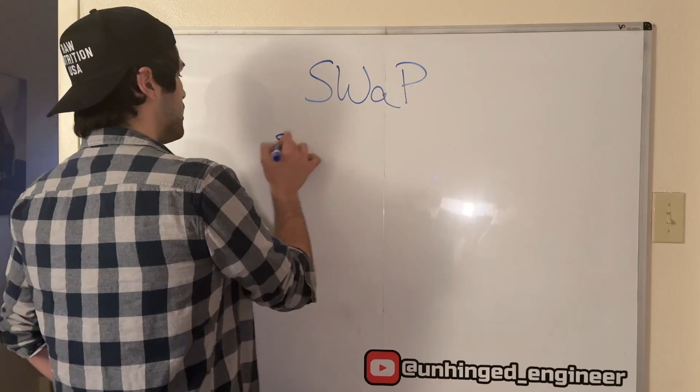So yeah, let's get into this super fundamental topic I really want to talk about today, and that topic is SWaP. I would be surprised if anyone who's began their engineering journey in any discipline, not just aerospace engineering, hasn't heard this before. But in case you haven't, it's an acronym that stands for size, weight, and power.

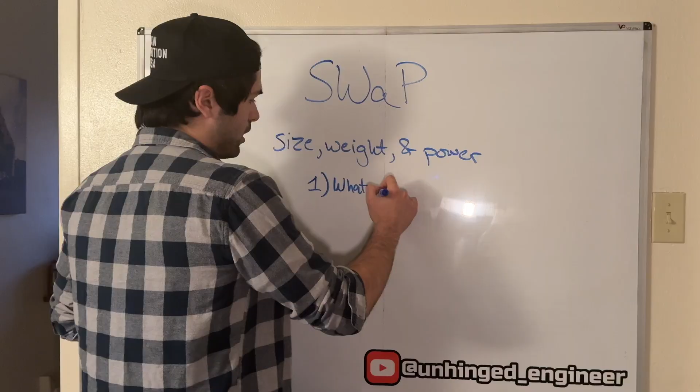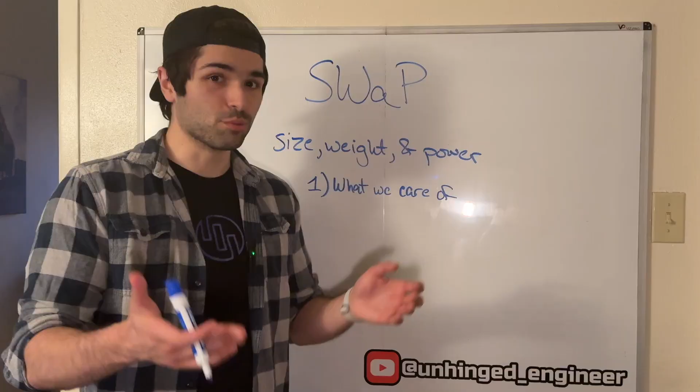And it serves to illustrate two things. For one, just on its face, these are what we care about - these are the qualities or characteristics of our system, our aerospace system, whether it's a drone or a satellite or even a wheeled robot, whatever we're working on, that we care about: how big it is, how heavy it is, and how much power it consumes in its normal operation. So on its face, it's just pointing out that these are very important qualities of these systems as a whole.

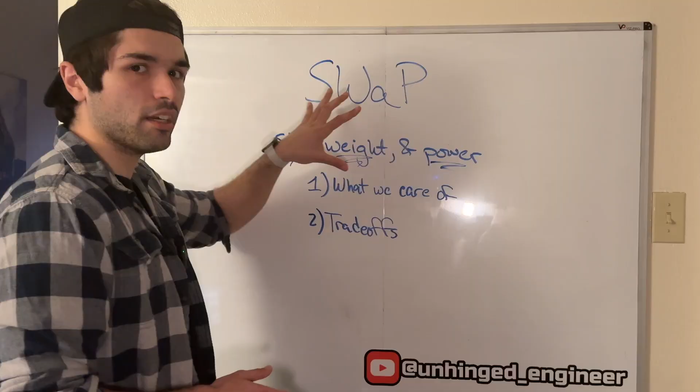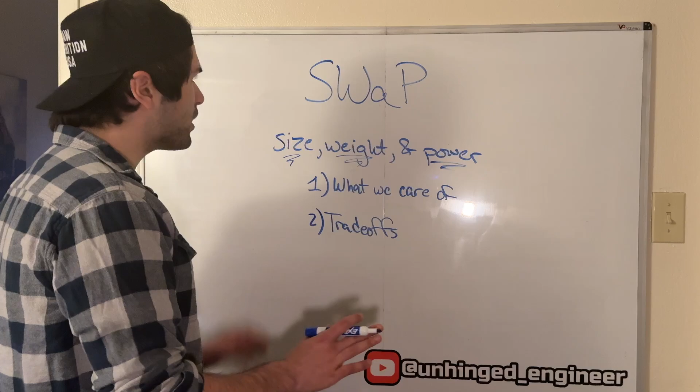But the more subliminal and, in my opinion, deep-rooted foundational concept here is this concept of trade-offs. This is the point that really made me want to talk about this in video form, because not only is it something you need to infer from this acronym - it's not explicitly stated here - but also I think this is where the magic really happens, and where when you talk to an aerospace engineer with years of experience, their understanding of this is what immediately sets them apart.

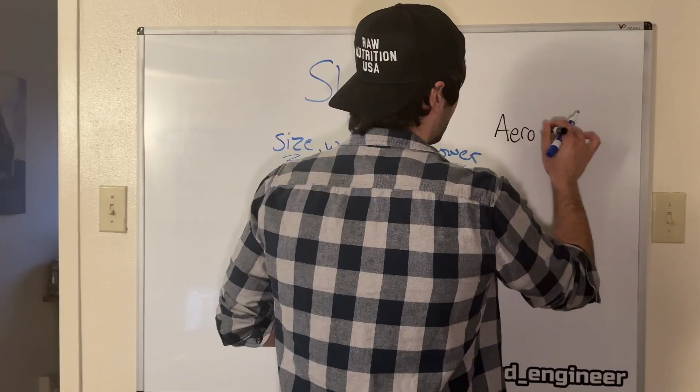And so before we get into the specific concept of trade-offs with size, weight, and power, I want to just affirm why I'm talking about aerospace here. Because as I'm sure anyone who's not studying aerospace is well aware, this is a very universal concept to engineering - it's important in mechanical, electrical, chemical, civil, whatever we're working on. But I think there's two fundamental things about aerospace engineering that make it particularly important and relevant.

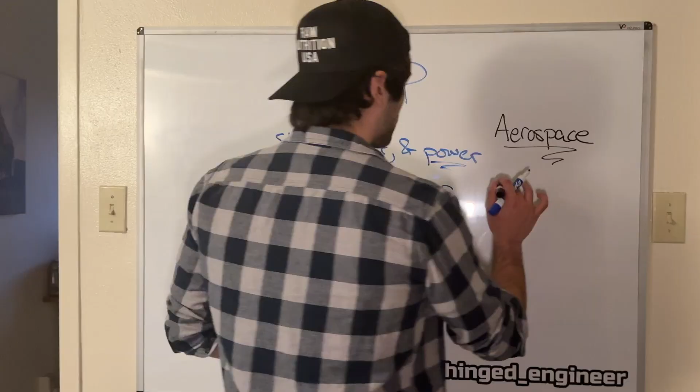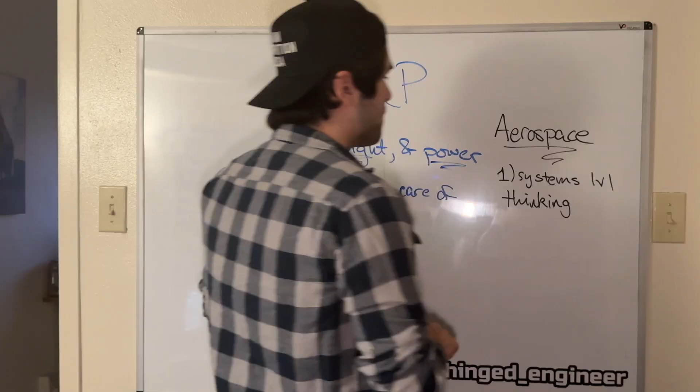So the first one I want to talk about is system level thinking. This is the way I was taught in school when I studied aerospace: other fields like mechanical, electrical, some of the ones I mentioned, you're really studying a field, an area of study. You're building up a knowledge base that you are then applying to different applications of the system. And this is why some of these degrees are much more versatile than you might assume an aerospace engineering degree is. So when you're learning about mechanical engineering, you're learning about mechanics and physics and dynamics and structural engineering, and that can be applied to lots and lots of different things.

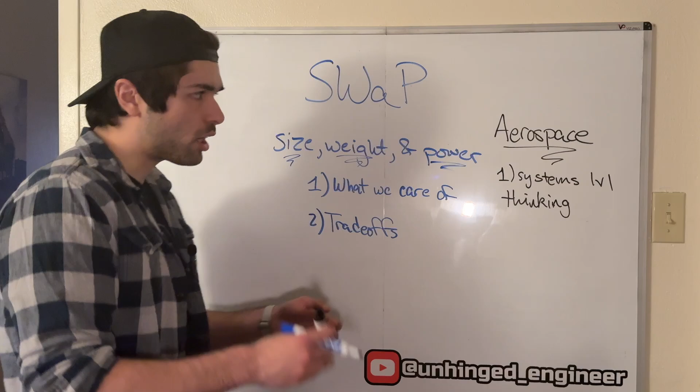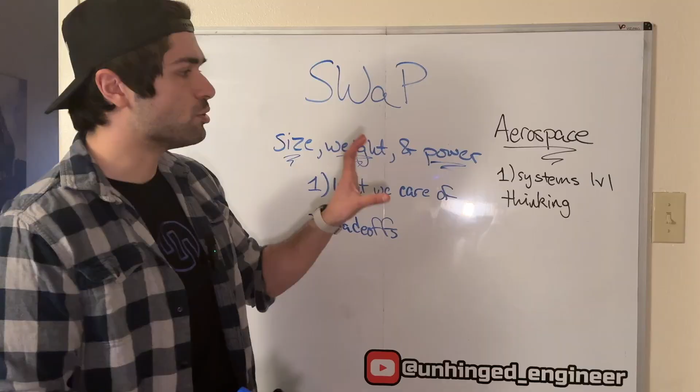Now contrast that with something like aerospace. Yes, we have to build up that foundational knowledge, obviously, but there's a shift that happens from that foundational knowledge base to a systems level overall view of types of platforms and systems, like aircraft, spacecraft, boats, wheeled vehicles, robots - whatever we're working on in aerospace. So we shift our mindset from looking at specific pieces of technical knowledge that we may need to apply in one way or another, to looking at a specific type of vehicle or platform, systems level thinking that we need to analyze as a whole in order to be effective building it.

And build it within the requirement set that usually have something to do with SWaP, as I'm sure you're well aware. And then second, speaking of those requirements, it's worth mentioning that, at least in my experience, building aerospace systems is a very resource constrained process as compared to other fields. Now again, I don't want to sound elitist here - obviously there are people who work in mechanical and civil or even biomedical who have encountered very resource constrained applications and projects who might be scoffing at me right now. But just to illustrate this point, let's assume we're looking at the power consumption of a system in mechanical engineering and a system in aerospace engineering.

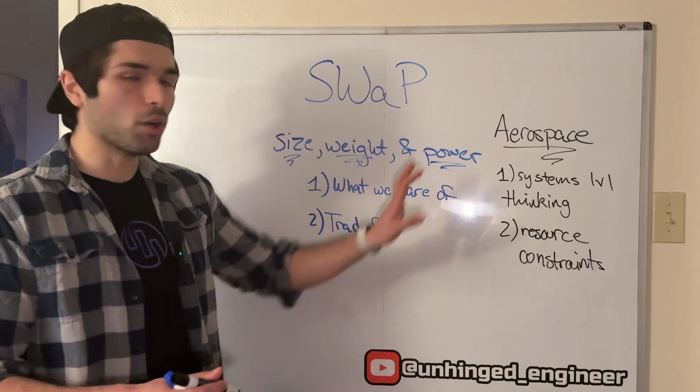So for the mechanical side, let's just talk about cars. If you're building a car, obviously you want it to be fuel efficient. You don't want it to burn way more energy than it needs to, either in its gas or in its battery if it's an EV. But ultimately, how power efficient your system is comes down to something you can sell, like saying, hey, I can run at this miles per gallon, or this charge time or distance, which is something we're trying to sell to people.

Contrast that with aerospace, where if you're working on a drone and looking at how much power it consumes, that determines how far it can fly. If you operate that drone without accounting for its power consumption, things start falling out of the sky and exploding. So this is an example of being very resource constrained, and the tightness of these constraints really exacerbates these trade-offs I'm talking about.

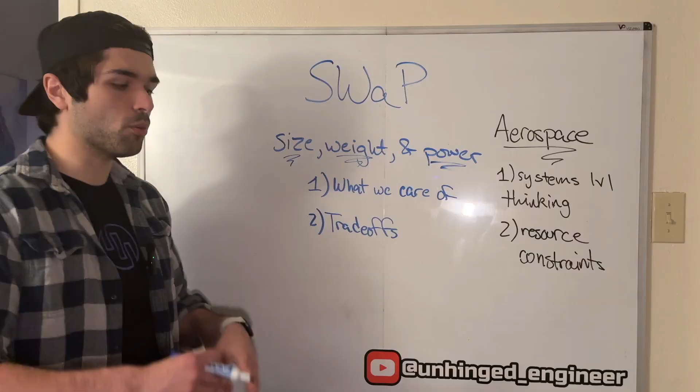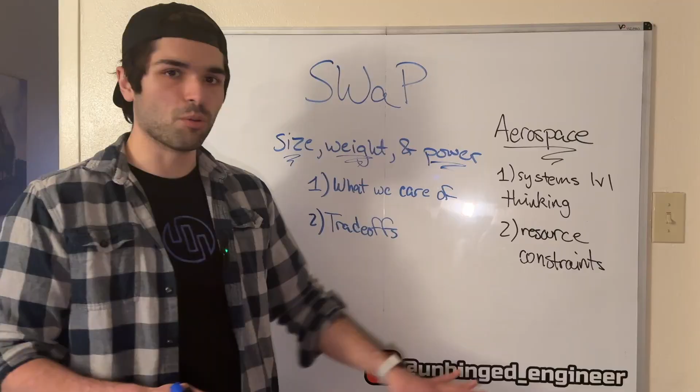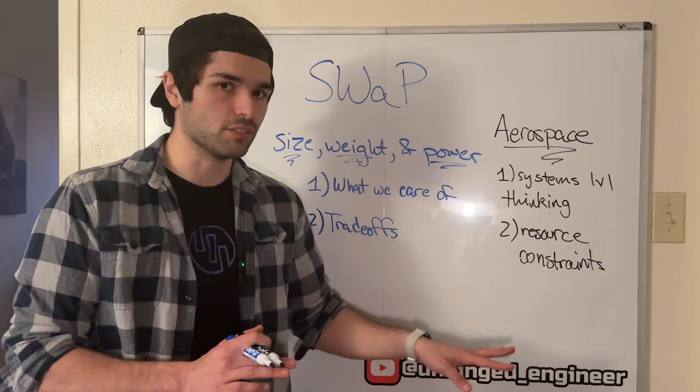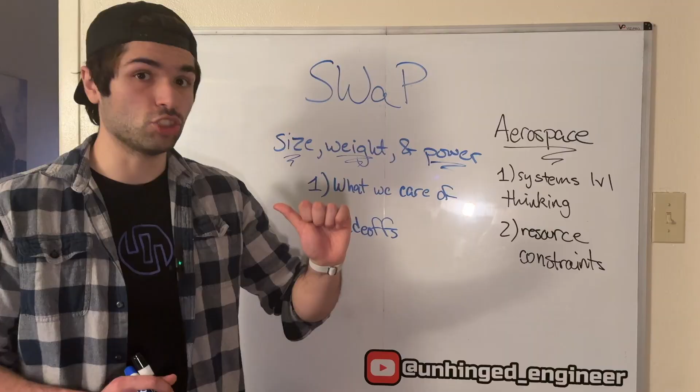Same thing goes for weight. With a car, we don't want it heavier than it has to be. We want the structure to be as effective as possible for the minimum amount of material, either for cost or for how heavy it is. But with drones, aircraft, or satellites, especially spacecraft, each kilogram of material or weight we send into space can be literally millions or at least hundreds of thousands of dollars. So there's a consideration at a higher level: every single gram on an aerospace vehicle has to advocate for itself and make sure it needs to be there, or else it's going to get chopped. Which might be different from working on something like automobiles.

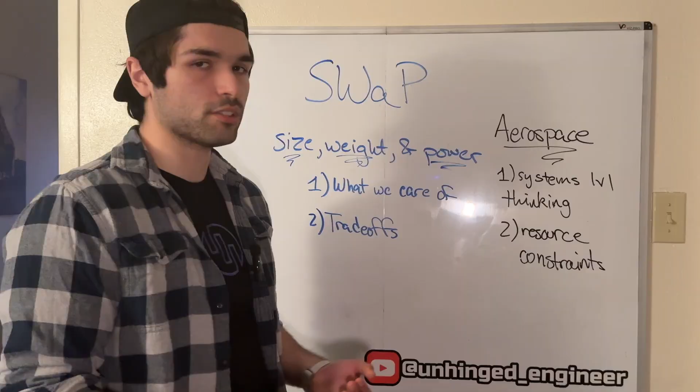So these are the two aspects of aerospace engineering in particular that I think are a super important concept for all fields of engineering, but make it particularly relevant to aerospace here.

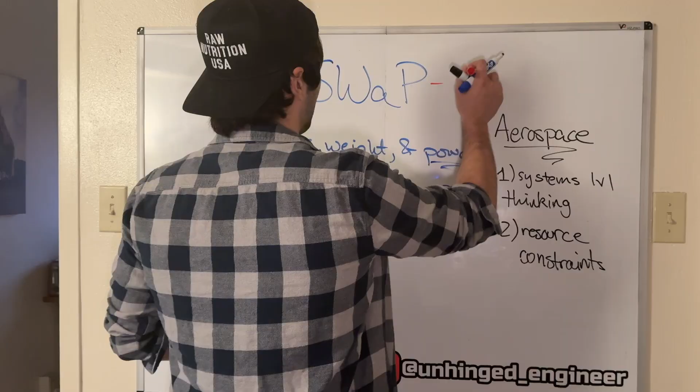One last thing I want to talk about before getting to a specific example is SWaP-C. You may have heard it referred to as SWaP-C. The C stands for cost, as is probably unsurprising. The reason I'm kind of leaving it out here is because cost is a very circumstantial thing that fluctuates a lot depending on what kind of project you're on, whether it's research or production level work, what kind of company you work for. There's a lot of factors that play into cost that kind of make it extraneous to this technical conversation about physical characteristics of our system.

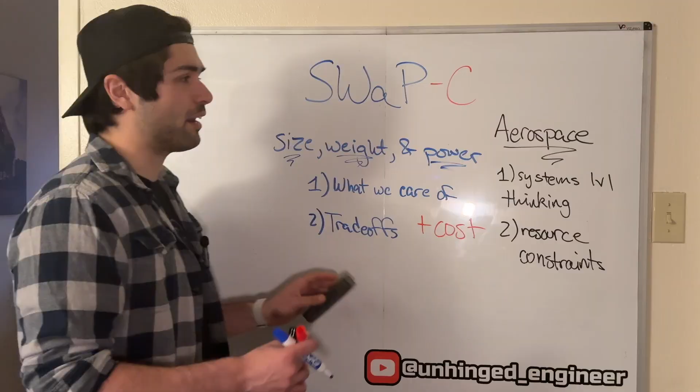The other reason, I think specifically with aerospace, is depending on what field you work in—cough, cough, defense—if that is the field you work in, cost may be more or less relevant. I'm not going to touch on the implications of that; that's for much more political channels than mine to decide. In any case, cost is another factor we very obviously care about, but the degree to which you care about it will fluctuate a lot depending on the type of place you work, the type of work you're doing, and what type of aerospace field you're working in—it might not be as relevant.

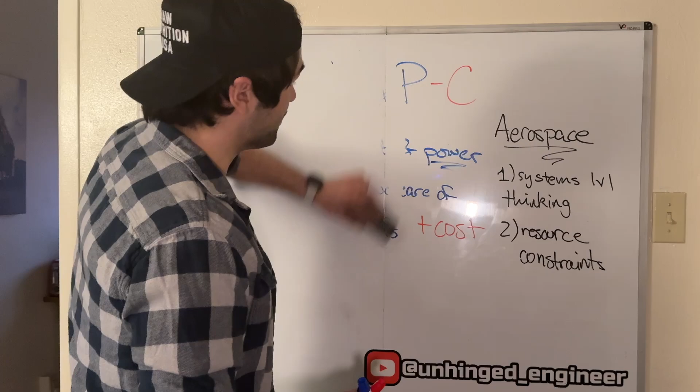So this is overall the concept I want to talk about, but I want to use a pretty good example. It is an aerospace example to demonstrate this trade-offs root concept I'm discussing here.

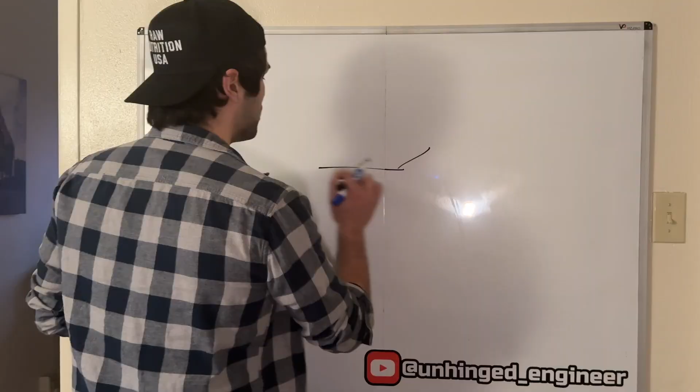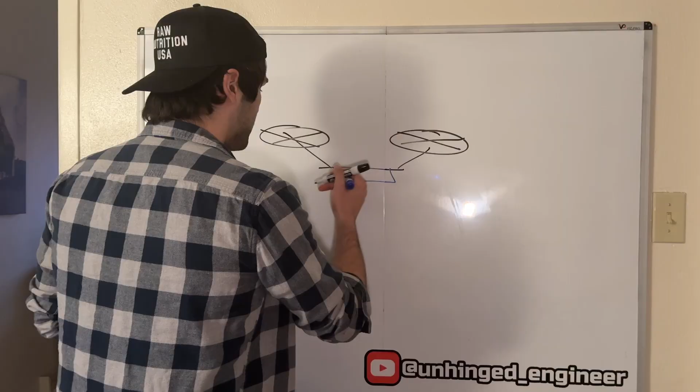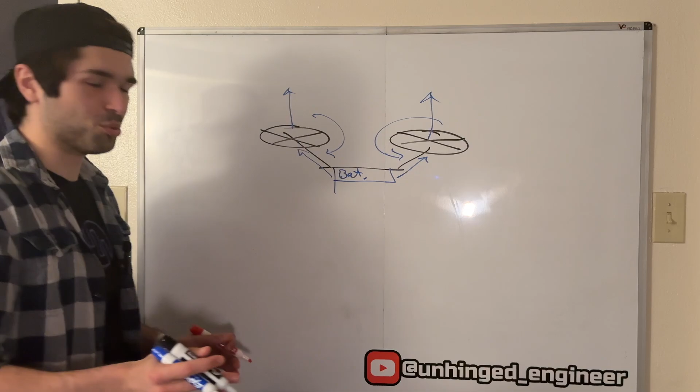To illustrate this point with trade-offs, really simply here, I'm going to draw a terrible picture of a drone. Let's just pretend this is a quad-rotor drone, and we're probably well familiar with how drones work. You've got this battery here, let's draw it in blue, and the battery supplies power to these motors, which then spin these propellers and generate lift. We're all very familiar with how drones work. Simple enough. And why am I using it here as an illustration of SWaP?

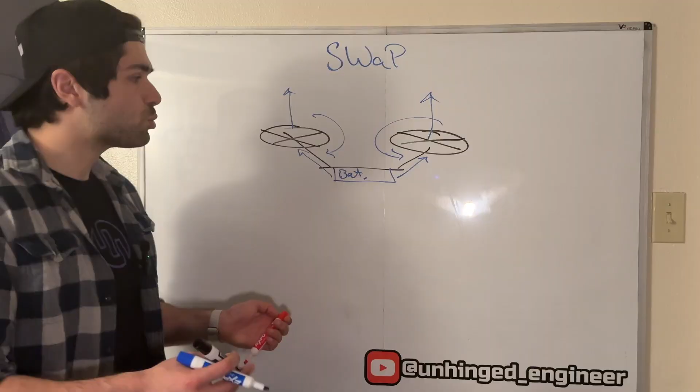Well, let's just talk about how in this simple example, we can immediately identify some very important trade-offs when making decisions about SWaP. So let's pretend, for argument's sake, we want our drone to fly further. Right now it has a range of 50 kilometers and we want it to be 80. The natural choice here is to get a bigger battery.

So a bigger battery is the drone equivalent of a bigger fuel tank. More fuel, more power means further flight time, more range, right? Which is great, but now let's think about some considerations here.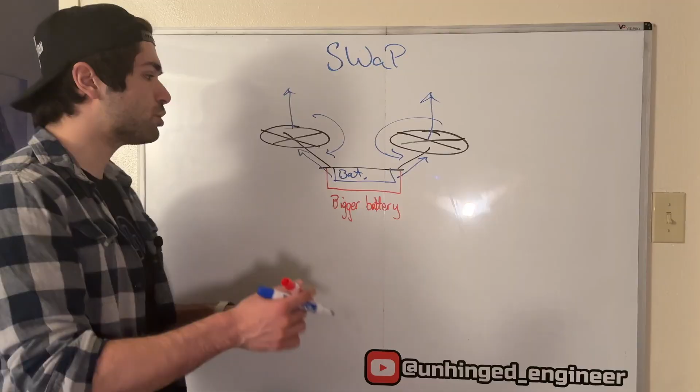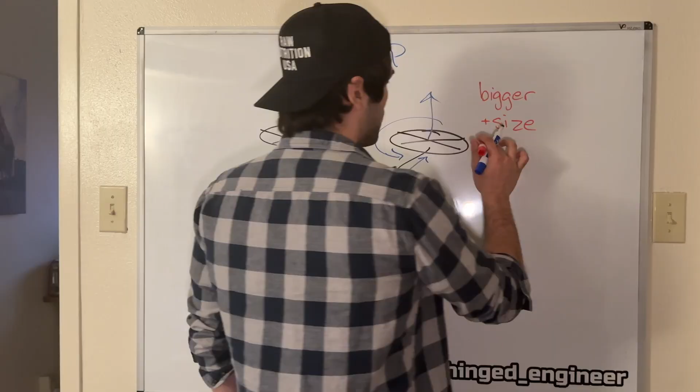For one, the bigger battery is obviously bigger, which means more size, which depending on the form factor we're shipping these drones in, or how detectable we're comfortable with them being, or even the amount of noise they make, that can be a concern. There can also be a weight concern, right? So if we're making a bigger battery, it is more likely than not heavier.

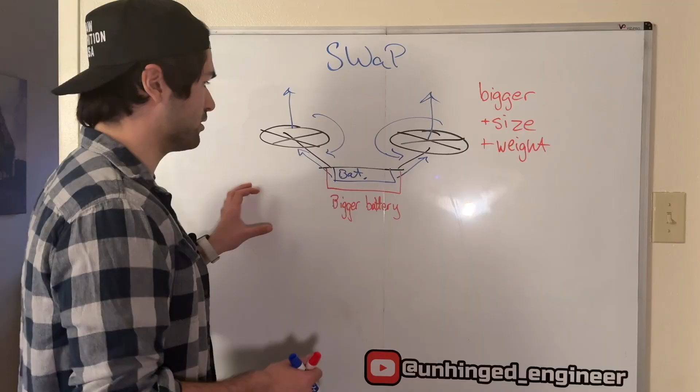And so if it's heavier, then we need more power. So we have to make sure that this trade for getting more overall power capacity in this battery is not offset by how much heavier the battery is. And that kind of gets into the quality of the battery there, right?

Also, these two are coupled, because if we have a bigger battery, we probably need a bigger housing to store that battery. So bigger housing, more material, bigger vehicle, heavier, you get the idea, right? These are all coupled, and we might just catch ourselves going into a whirlwind of saying, okay, we put this bigger battery on, now everything else about our power consumption has been hindered, right?

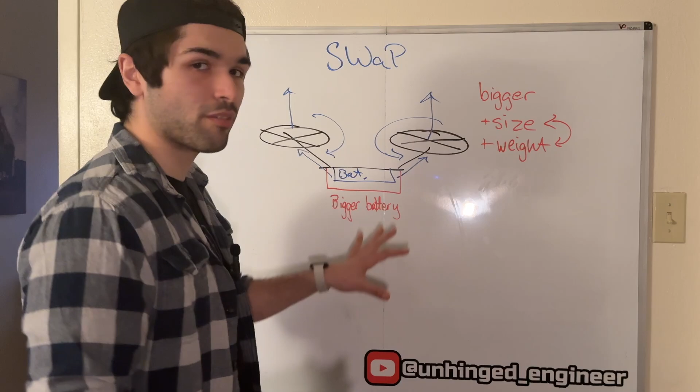So we need more power, our range didn't go up that much, and now we need an even bigger battery, which obviously is circular logic. This is not what you want to do in the real world, but it's a very real kind of pothole that engineering teams can find themselves getting into, right?

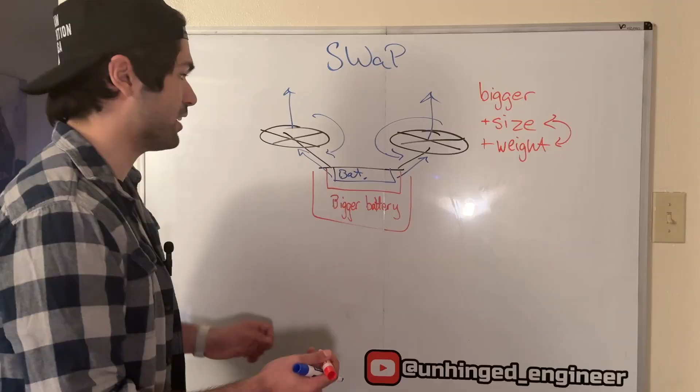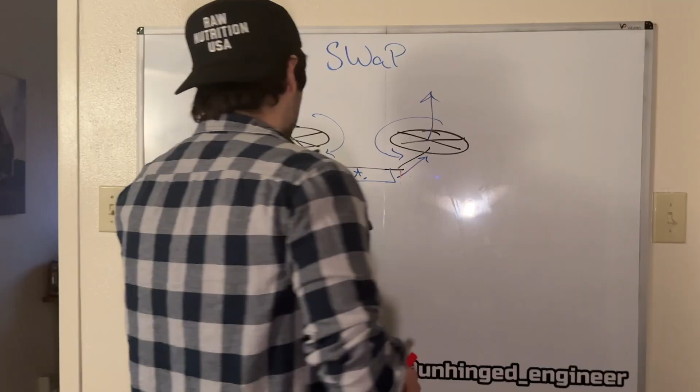Now let's do a different example. Let's say, for argument's sake, we want the drone to be smaller. Let's say we're trying to ship a bunch of them, and we want to store them all in these trucks. They gotta be smaller to store more. Or in a defense setting, we want it to be less detectable, right?

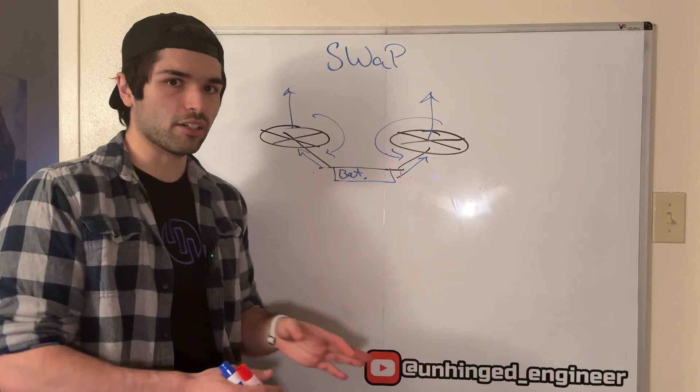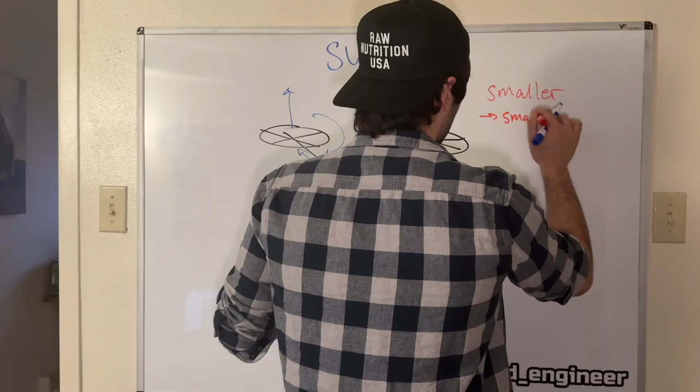So smaller drone might mean smaller battery, which then means less power, which is a big uh-oh, right? Because now our range is significantly reduced. So smaller drone means smaller battery, means less power.

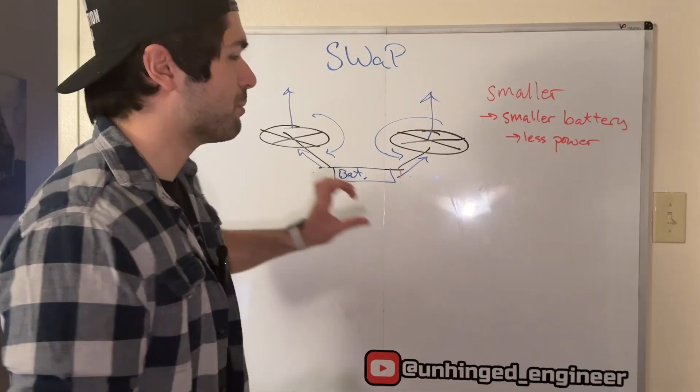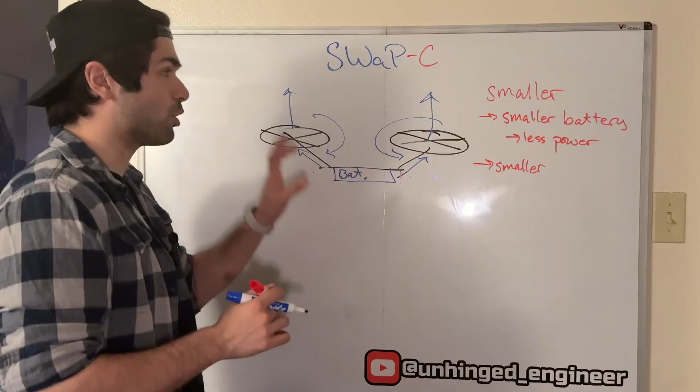But let's even get some of this cost in here. Now let's say it's a smaller frame on this drone. Well, is that frame just as durable as it was before, even with less material? Do we need more material, like thicker kind of struts on this drone? That's going to be heavier.

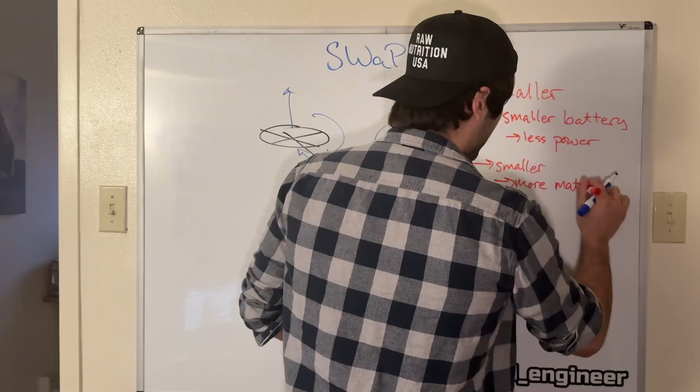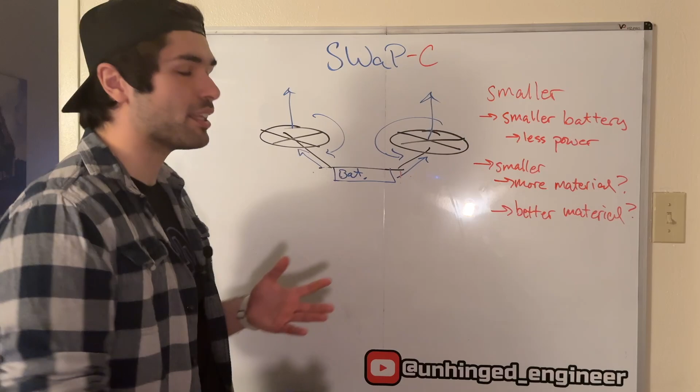Do we need more expensive material, better material, like some kind of crazy carbon fiber that's way too much money? That's not cheap. These are all considerations of saying, oh, we want the drone to be smaller, or oh, we want the drone to consume less power. It's not really that simple, because all these dynamics of SWaP and SWaP-C are interlinked, and how you change one affects how the others change.

So as we're trying to turn these knobs in the directions we want, other knobs will start turning in ways we probably don't want. And it's really, really important to account for this when we're engineering these systems, okay?

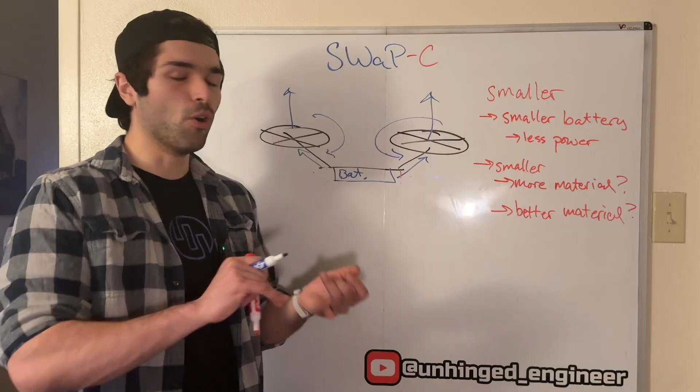So yep, this is the super, super simple video I wanted to talk about today. There's no math, no numbers, but as you can probably tell, it's very, very technical. As we're writing up requirements from the beginning, as we're doing testing throughout development of our system, and then ultimately as we're measuring performance of the actual fielded platforms we build, it's really, really important to keep these dynamics in mind, lest we fall into some of the rat holes that we see lots of overly costly or inefficient systems fall into.